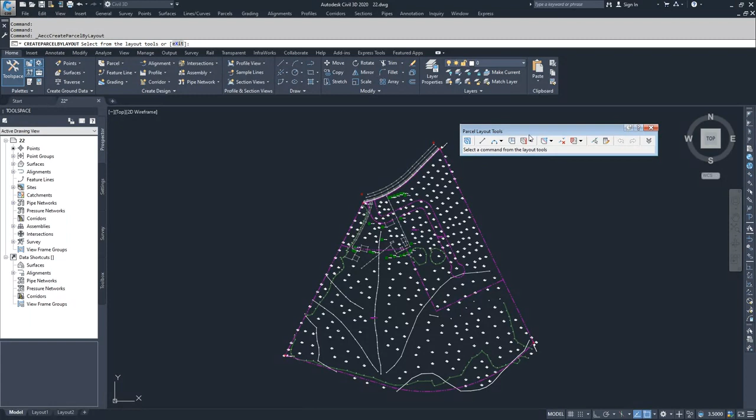We're going to specify our automatic parcel creation parameters. We'll do a minimum area of 1/3 of an acre, which is 14,375 square feet. We're going to set our minimum frontage as 60, leave minimum frontage at offset as yes, and change our frontage offset to 20 feet. We'll have a minimum depth of 50 feet, not specify a maximum depth, and use the shortest frontage.

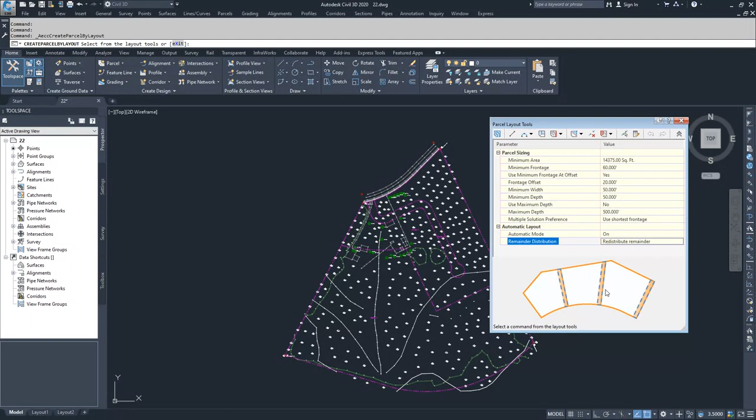For our automatic parcel creation, we are going to leave it on automatic mode, and we are going to choose to redistribute the remainder. The choices for remainder distribution: if you come up with a solution and have a small parcel left over that doesn't meet the parcel sizing criteria, this is how you choose to redistribute that remainder. You can either create a parcel from the remainder, place the remainder in the last parcel, or redistribute the remainder across all the parcels you create. I'm going to choose redistribute remainder, and you can see in the image below how that remainder distribution is going to work.

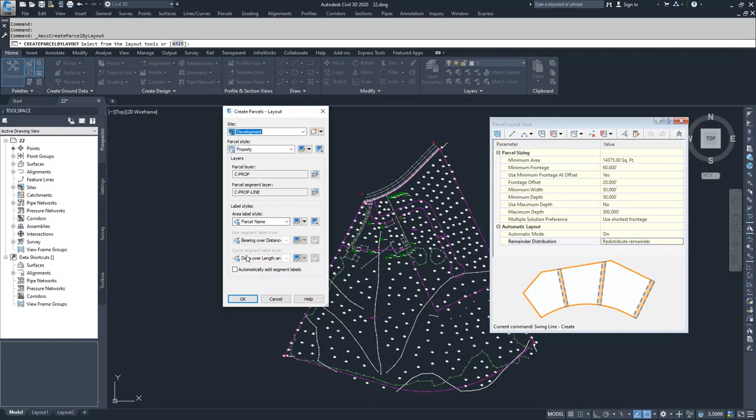Now we're going to drop down and do a swing line creation first. Civil 3D is going to prompt us to select what site we want to do it in. We have these previous 3 parcels in the development site, so we're going to keep using the development site. We're going to make them property parcels, and we are not going to assign label styles yet. We're going to click OK.

Civil 3D is prompting us to select a parcel to be subdivided. I want to subdivide this area so that we create smaller developable lots. So I'm going to select the area label for this parcel, and then Civil 3D will prompt me to select a starting point on my frontage. My frontage is going to go along what could potentially be my right-of-way parcel.

I'm going to select this point on my right-of-way frontage. I'm going to go along this line, and Civil 3D forces me to stay on this line because it knows that this entity is a frontage. So I'm going to select an area that is about perpendicular to the corner of this, right about here.

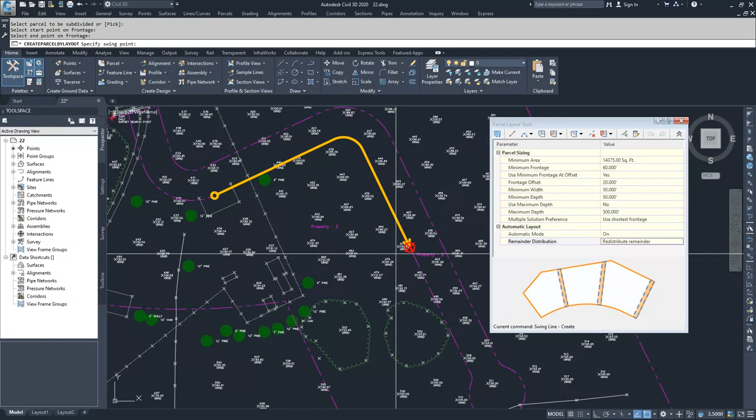Civil 3D is asking me to specify a swing point. My swing point is going to be from this point right here. What Civil 3D automatically does is create these 3 swing line parcels and tell me that this is going to be a new parcel and this area is going to be a new parcel. So I'm going to hit enter to accept that.

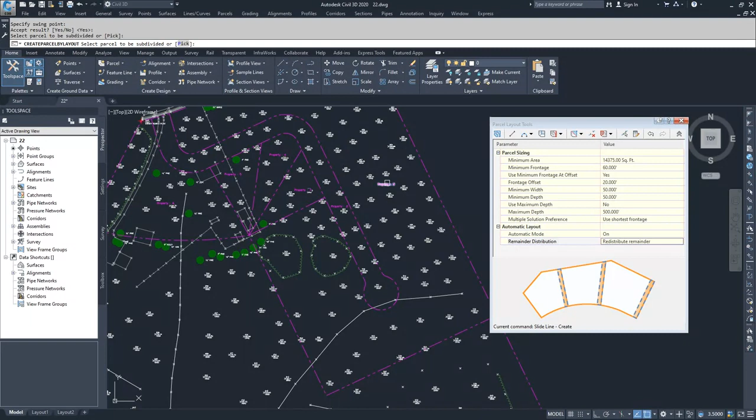Then I'm going to drop down and choose a slide line create. Slide line create is asking me to subdivide another parcel. I'm going to select the area label for this remaining area down here. Civil 3D is going to then prompt me to select a point on the frontage. I'm going to start here, come around my frontage this way, and go all the way around my frontage to this point here.

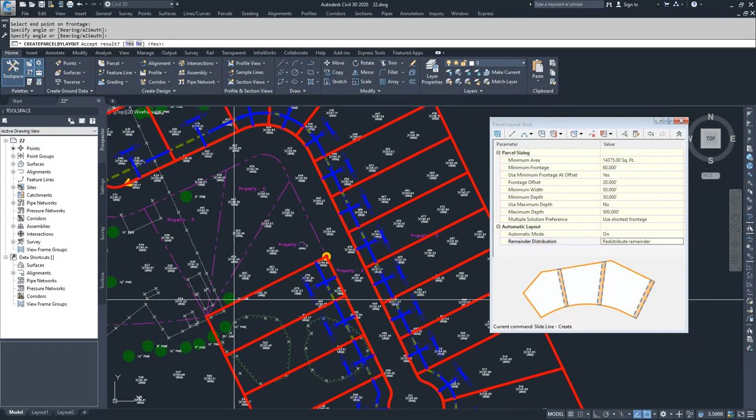Civil 3D is now asking me to specify an angle. This is the angle that our parcels will come off of our frontage at. So I want to select the endpoint of this parcel and select the back point of this parcel. What Civil 3D is going to do is automatically create all these parcels along that frontage. I'm going to hit enter to accept that, and I'm going to do one last slide line create.

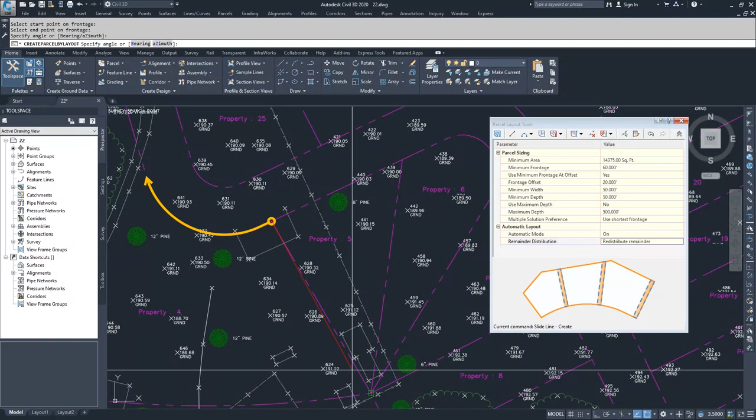I'm going to subdivide this property. I'm going to use the frontage from this point, returning around to the end of this curve, and specify my angle from that point to my swing line point. It's going to give me 3 more parcels, and I'm going to hit enter to accept those parcels. We have now used swing line and slide line to subdivide this single parcel into multiple smaller parcels.